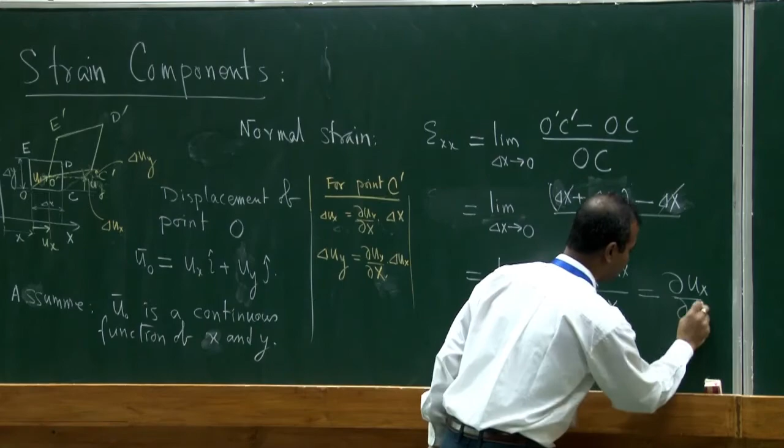CALDAM School on Discrete Mathematics was organized in February. It brought together prominent and leading researchers in discrete mathematics to give lectures on recent developments in the area. This was organized to benefit university teachers, researchers, and doctoral students in the area of discrete mathematics and computer science, by exposing them to recent developments in discrete mathematics, algorithms, combinatorics, and graph theory.

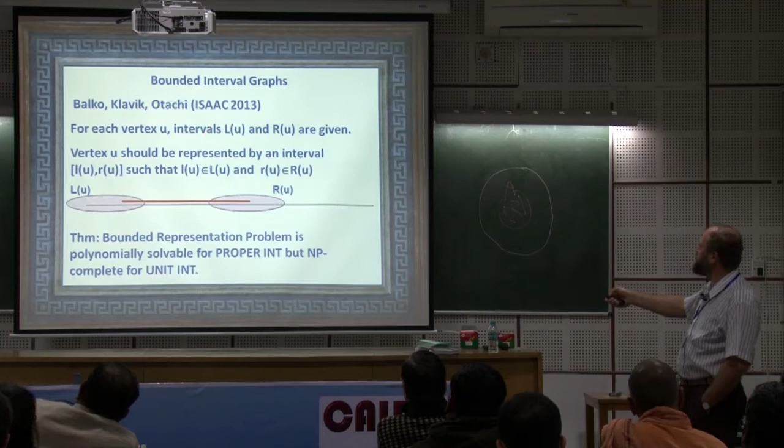Okay, so the bins that were easy before remain easy. These big bins, which simply have huge size, we don't change the weights there. Now we look at the dedicated bins, which are the bins that have a single item. You get an interval where the left point can lie and an interval where the right point can lie. Admissible positions for the left point of the interval IU and for the right point of the interval IU.

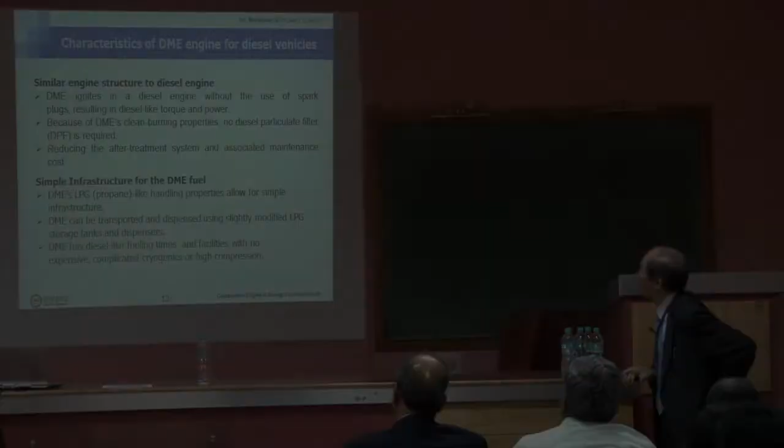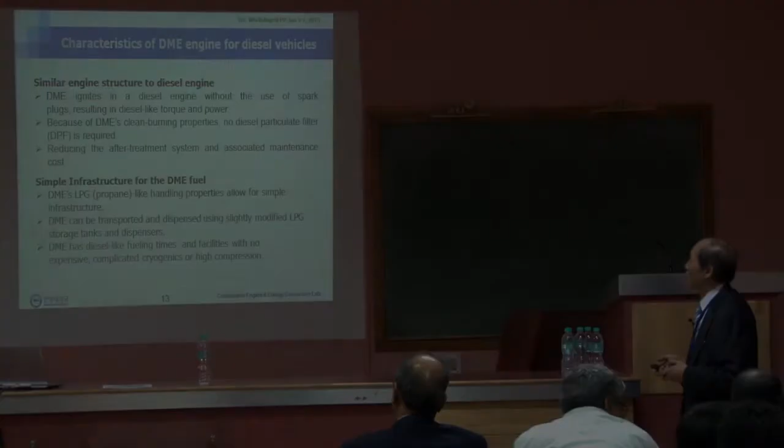In January, the International Workshop on Sustainable Energy, Power and Propulsion was organized. The 3-day workshop was held at Jadavpur University, Kolkata. Several teachers, researchers and engineers from academia, industries and research organizations worldwide attended this event to discuss major technological advances in this field.

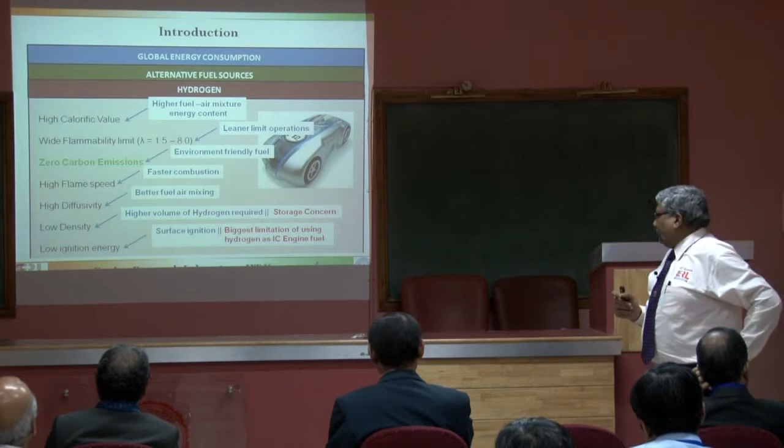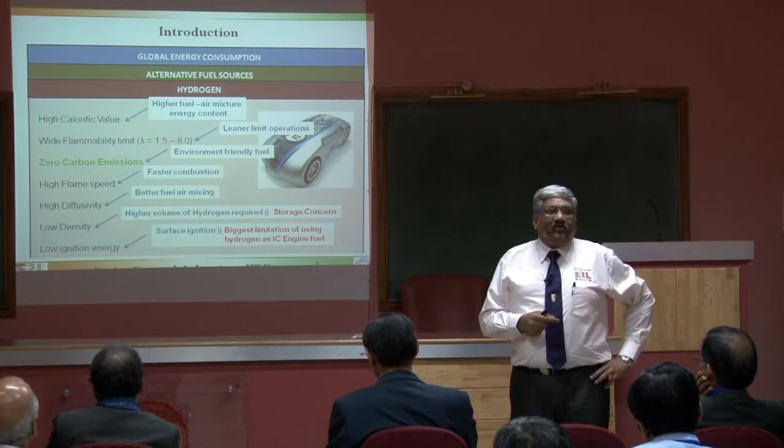An order of magnitude lesser amount of ignition energy is needed to initiate the combustion. So that's very good because we don't have to invest too much energy to start the combustion. But that's very challenging because if there are any carbon deposits inside the combustion chamber, even the hot tip of the electrode spark plug is enough to uncontrollably initiate the combustion.

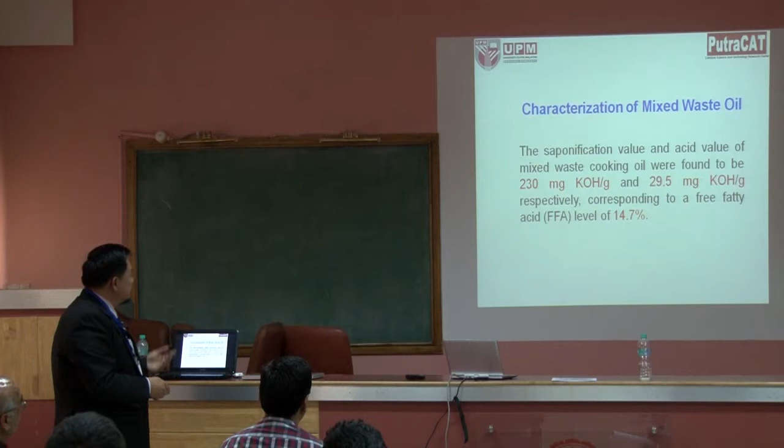And the oil we clean up and we reduce the water content and also some of the food from this oil, and then we run some acid. It consists of 14.7, a bit high level of acid content as well.

Short course on structure and characterization of materials was held in December 2014. It was organized to demonstrate the relevance and importance of key materials characterization methods to teachers and industrial participants, and to familiarize them with technical advances that have taken place over the years.

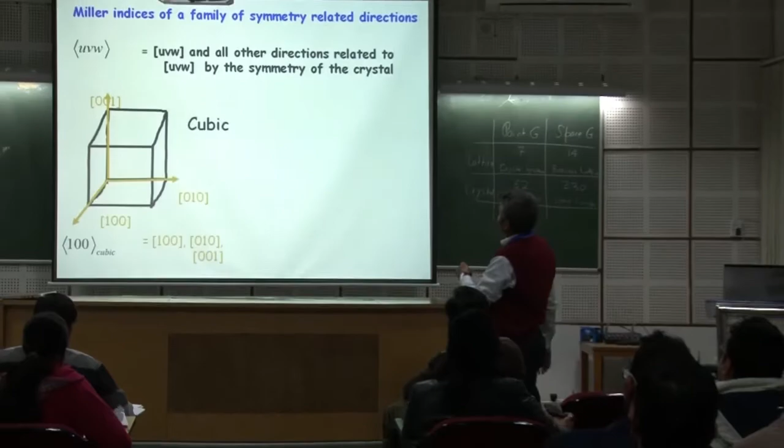Okay, if it is a 2, then it forms a needle. So that information we can immediately judge before seeing the microstructure. That information can be obtained by looking at the n value. So now once we know this, I can get it at a different temperature.

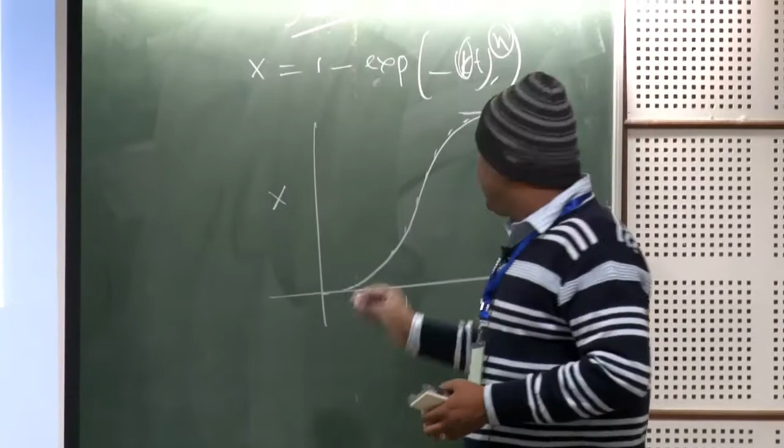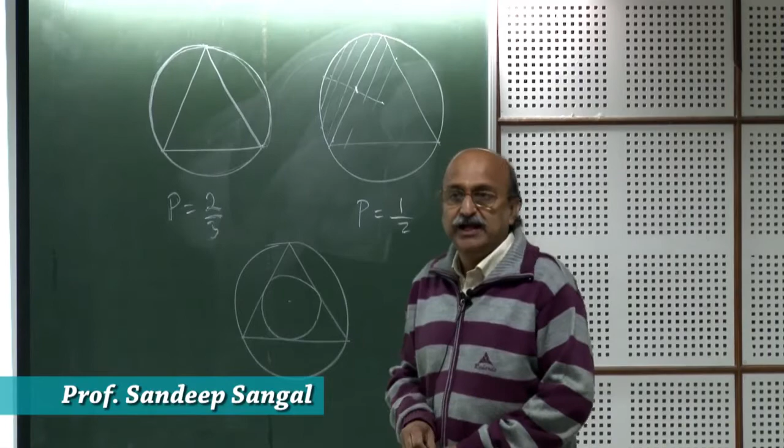So area of this would be 1/4 of the area of the full circle, and if the point has to lie outside, then only the chord length will be less. The probability is 1/4. So, there are at least 50 research publications written on this Bertrand paradox.

TEQIP workshop on digital communication and networks was held in December. It aimed to highlight the most important concepts of digital communication and networks, especially from the perspective of undergraduate teaching. The focus was on basics and ideas that constitute the bedrock of modern communication systems.

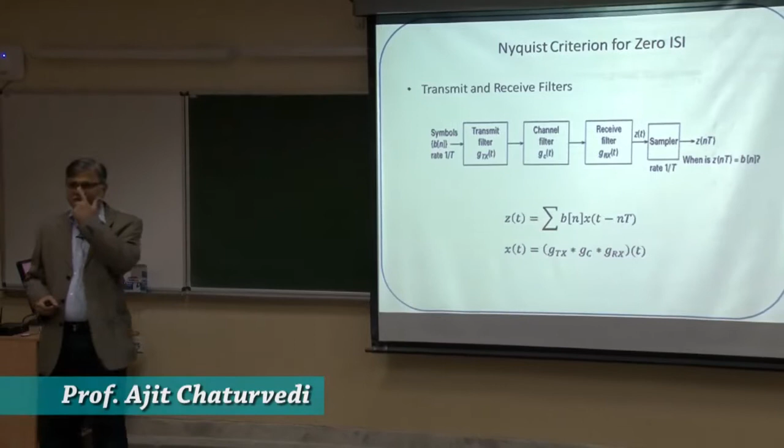So, the next obvious point to be discussed is the pulse shaping or the Nyquist criterion for zero intersymbol interference. In all digital communication systems, it shows up because it is not present in analog communication systems, because analog communication systems do not have any symbol representation.

In December, a winter internship and visiting researcher program was organized. This was a 3-week program in which selected students and teachers worked under the guidance of IIT Kanpur faculty members.

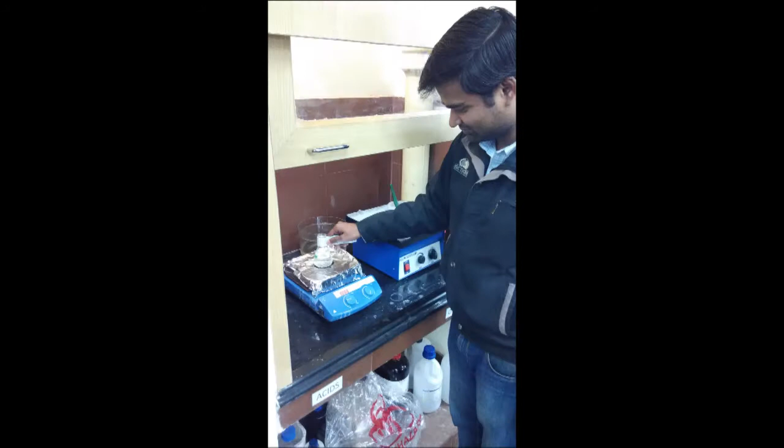Bhupesh Dutt Sharma. I am coming from Motilal Nehru National Institute of Technology, Allahabad, and I am a research scholar in the Department of Mathematics, and I am here to attend the winter internship program, which is an initiative of TEQIP and IIT Kanpur, a very good initiative taken by these two institutions.

Hello, I am Neha Gupta and I am here for the TEQIP IIT winter internship, and it is very nice to be here. I am searching for so many papers, and we are visiting the library also to see thesis of students so that we can get some guidance for our future work.

Myself Praveen Kumar Sahu. I am a research scholar in the Department of Mathematics, MNNIT Allahabad. Here I am working under the supervision of Professor Ratish sir in the field of computational fluid dynamics. We are working on computational fluid dynamics methods for the problem of shock waves in astrophysics.

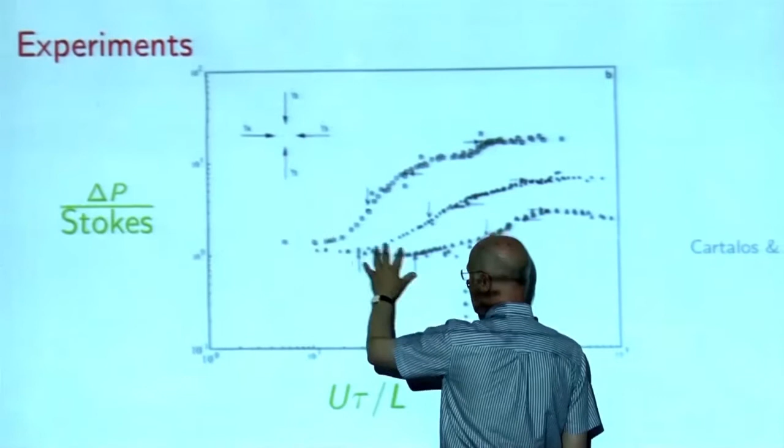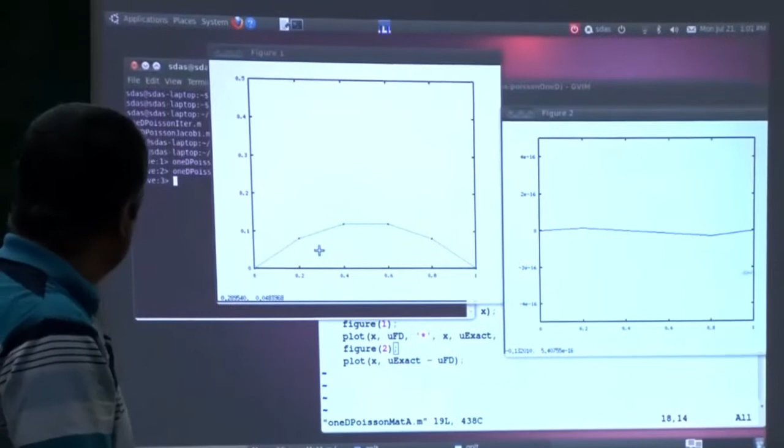Or more complicated models, they all have roughly the same slightly non-linear effect. Well, I showed you this before. If you look very carefully, you can see the pressure drop does decrease, as in the computing. So in that model liquid, we get this bit right. We of course fail to get that bit right. So this is a 50% success rate, fairly close to 0. So this is not the problem that we should be looking at.

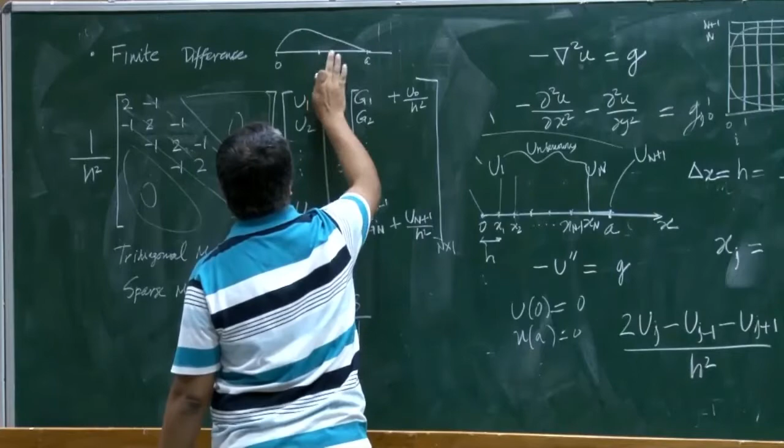So then I take another problem in which what I do is take the 1D case, but the distributed force is non-zero. So this is 0, this is A, and this is the entire string. It is non-zero only over the first half of the interval, then subsequently there is really no distributed force, so that part of the string should be a straight line.

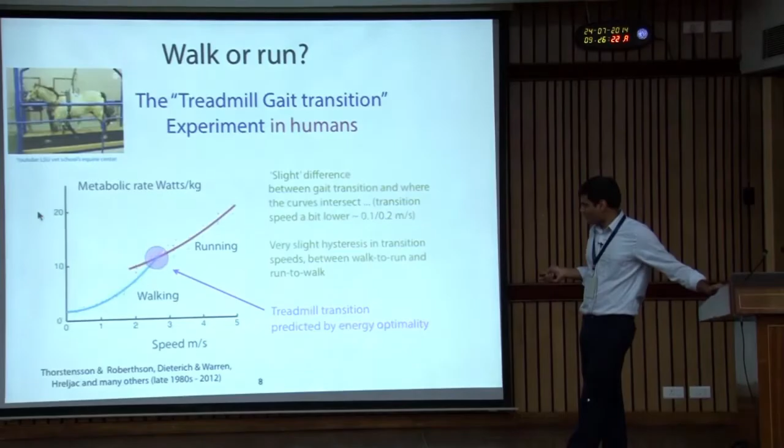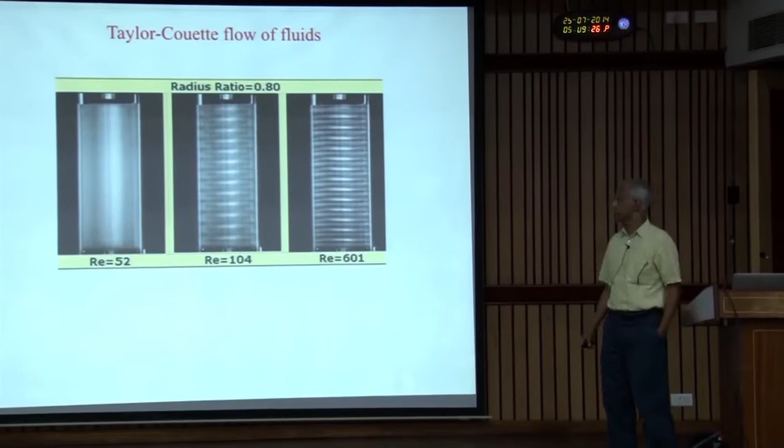The particular problem that I am interested in, that is widely used in the domain of fluid mechanics, is Taylor-Couette flow. That is, you have two concentric cylinders.

You have an inner cylinder, which you can't see, and then an outer transparent cylinder. There is a fluid in between, and when you rotate the inner cylinder, you can measure the viscosity from the torque. That is why this is very frequently used—in fact, it is the most commonly used viscometric device to measure the viscosity of fluids. But the interesting thing it does is, and this is an old problem,

as you increase the rotation rate of the inner cylinder, there is a spontaneous instability, and you start seeing bands of this kind.

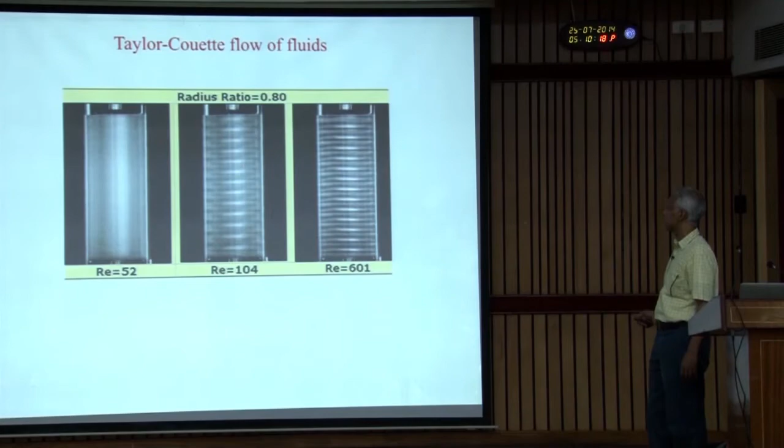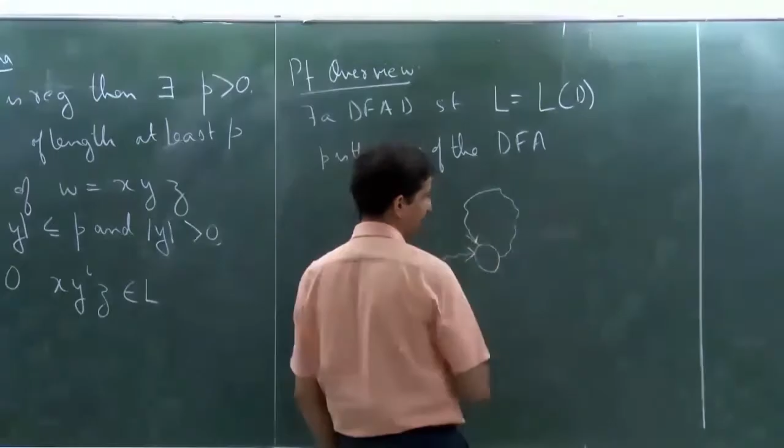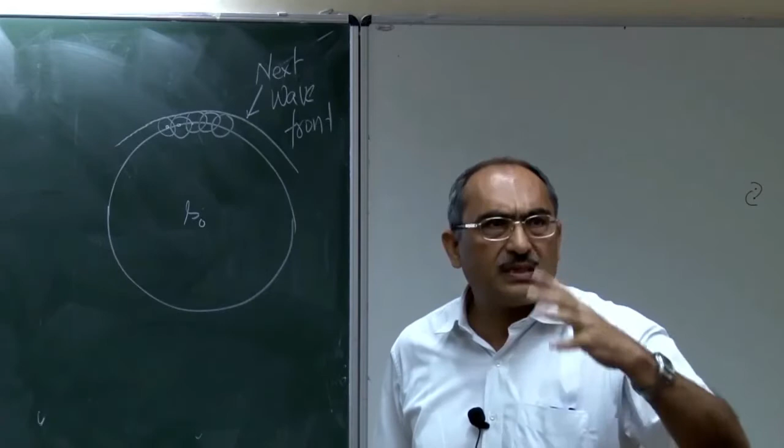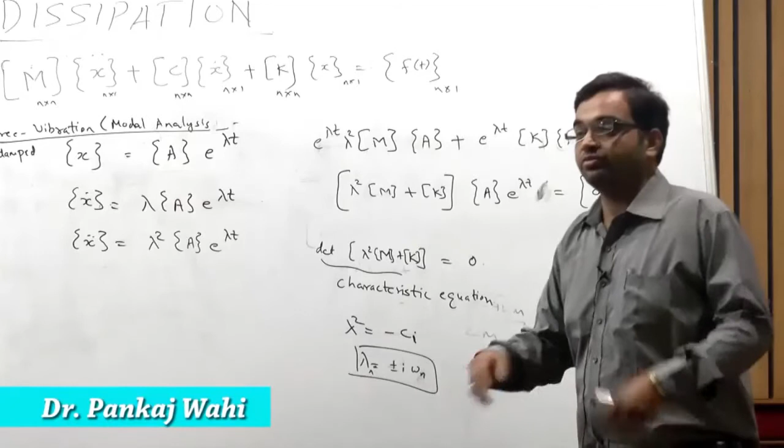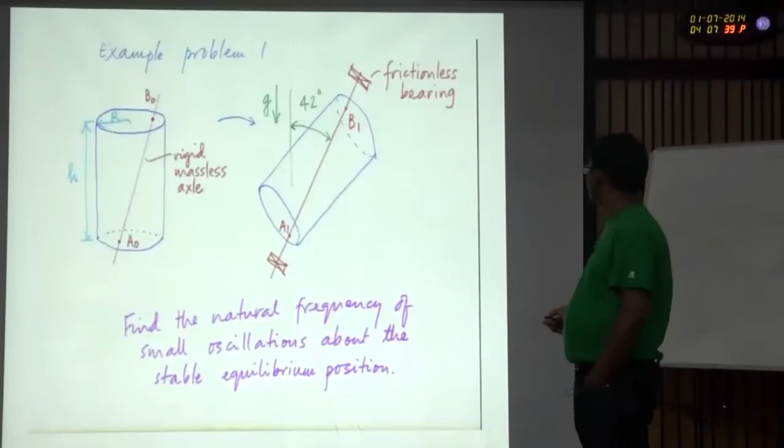So here is a problem. There is a uniform rigid cylinder. I choose an arbitrary point A0 on the bottom face, another point B0 on the top face, and put a rigid massless axle passing through these two points. Then I take this axis A0, B0 and orient it so that it is 42 degrees or some such from the direction of gravity, so that this becomes some points A1 and B1, and I put it on rigid frictionless bearings, and then I release it—it finds an equilibrium position.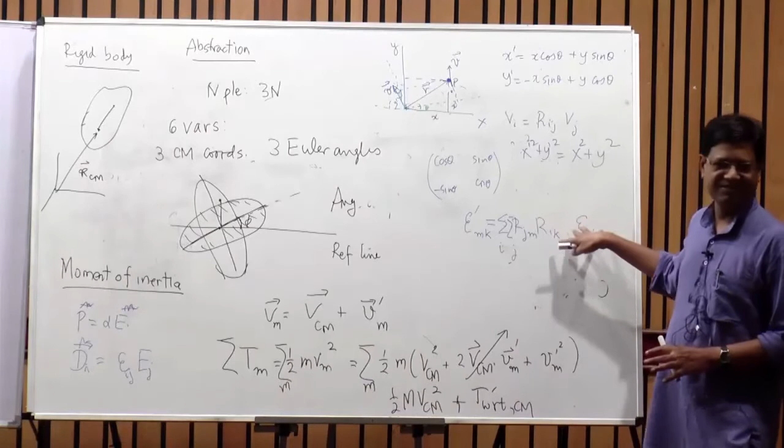In June, TEQIP workshop on mechanics and physics was organized. The 4-day workshop had rigorous sessions on various aspects of mechanics and had a detailed discussion on what should be taught as part of physics in the undergraduate curriculum of all engineering institutions.

Product of these three matrices, it is in this form. I need to just look at it more carefully, and it can be done.

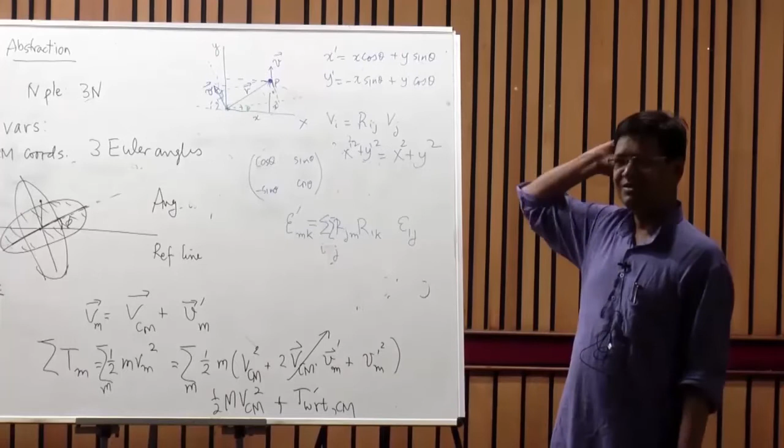So this is how we get this 9 component object transform from blue frame to green frame.

In terms of position and momentum, I can write them as two first order equations, and 2 first order equations would still require 2 initial conditions. That can't change. But now what I'll do is simply tell you what is x at t equal to 0 and what is p at t equal to 0. I give you an initial condition just of the variables concerned.

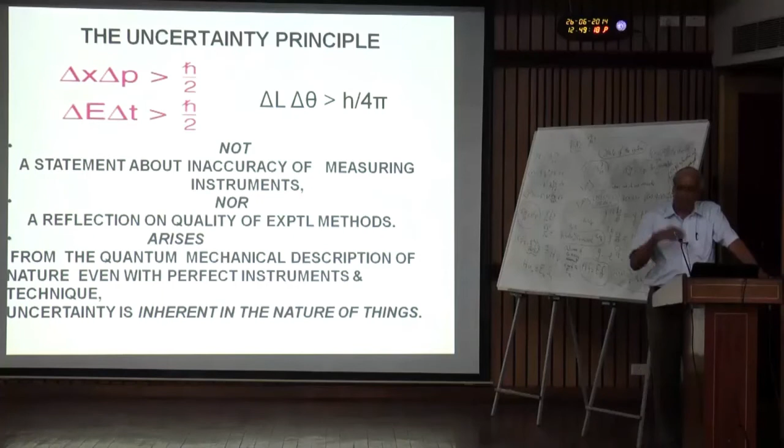The trio of this: delta x, delta p, delta e, delta t, delta l, delta theta. Delta e, delta t is a little different because they are not simultaneously measurable quantities.

Psi is to be known. If psi is known, everything about the system is known. What is everything about the system? What is it that you want? First thing is energy. When energy is known, along with that, its tail comes. What is that? Eigenfunction. Like that. So find all the information, put them together. Psi is the grand fellow. But these fellows are energy eigenfunction, momentum eigenfunction.

After this, the TEQIP workshop on teaching methodologies in chemical and material sciences was held in February 2014. The workshop tried to evolve a comprehensive mandatory curriculum in material science for all engineering students.

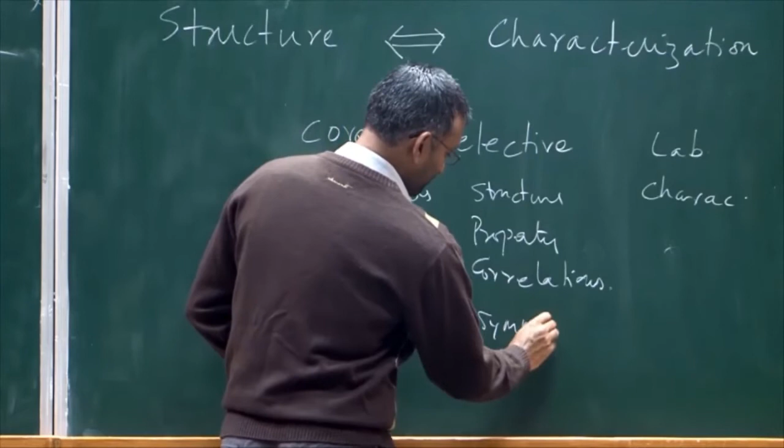Somebody was talking about the mechanical behavior. How does that behavior come from the? I think things like symmetry and space can go there. Advanced crystallography. No, as elective. Yeah, those are elective.

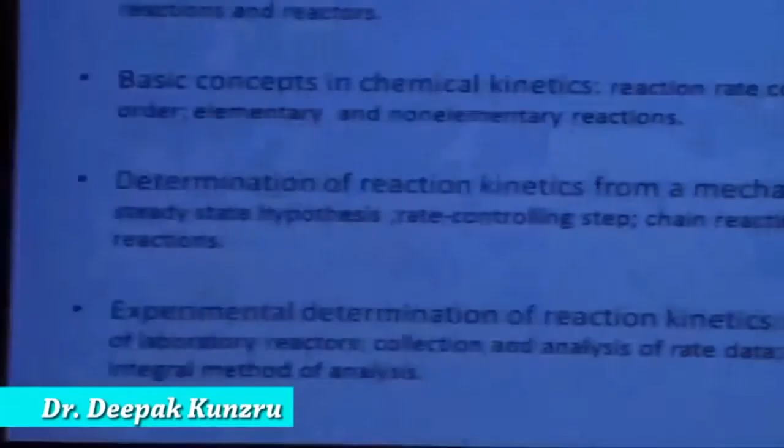So some of the suggested topics which are listed here, we can have a discussion on that.

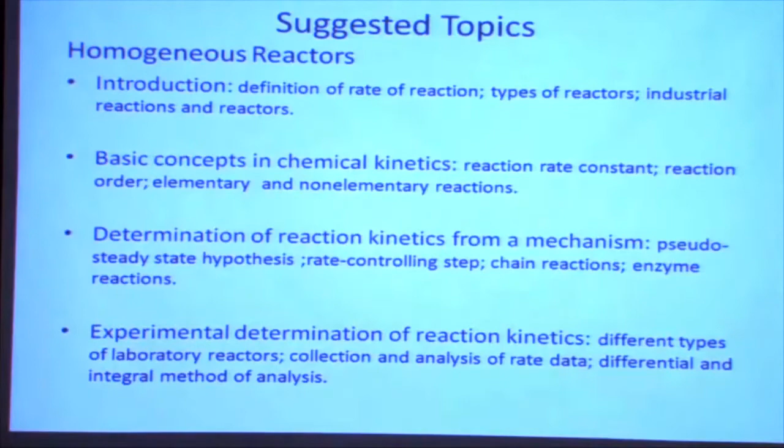Basically, you can divide it into two groups: homogeneous reactors and heterogeneous reactors. Now, as Professor Goutam Deo gave a sort of summary yesterday, some IITs have two courses in chemical reactor engineering, some have one. I don't know about the other colleges, but at least at IIT Kanpur we have one compulsory course and one they can take as an elective.

Does it tell you bonding or valence or something else? One can make a table of one page for every technique, that tells you the applicability of the technique. What kind of problem do you use this technique for?

Workshop on system engineering was held in December 2013. This was conducted based on popular demand from the faculty and students of the institutions under QIP IIT Kanpur.

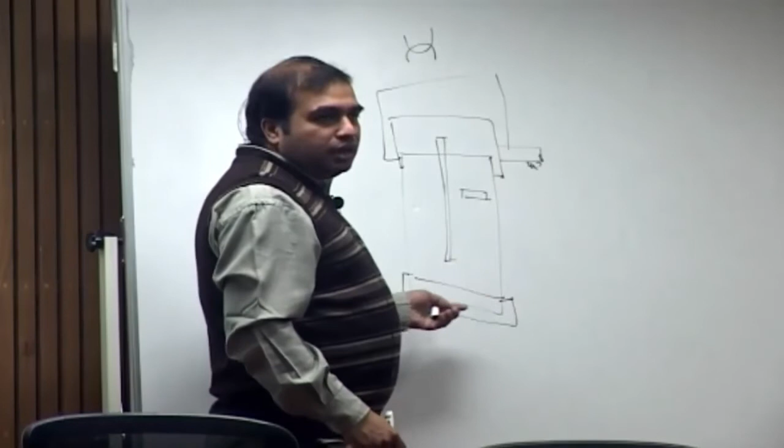Carrying mechanism for you to carry, and this can be folded in, and they will give you two bases, one for your home, one for your office. The formability is very, very important. How can you change the shape so easily and get what you want? That's very, very important, okay.

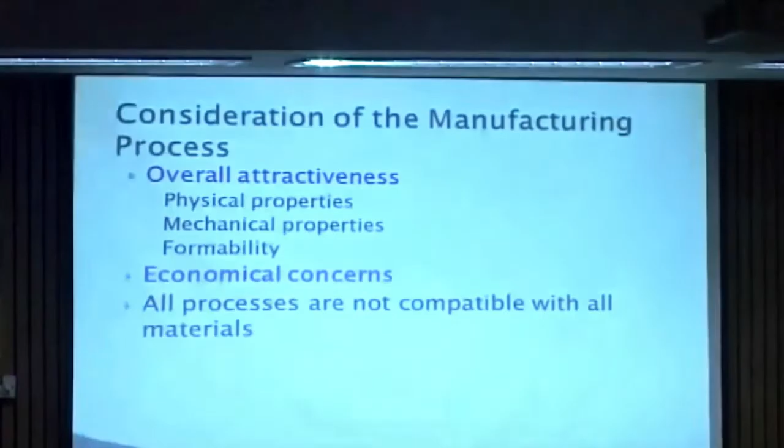In October 2013, Pravartana, a workshop on applied mechanics, was held. The workshop featured detailed research-oriented talks by experts from a wide spectrum of topics in mechanics. So not clearly defined.

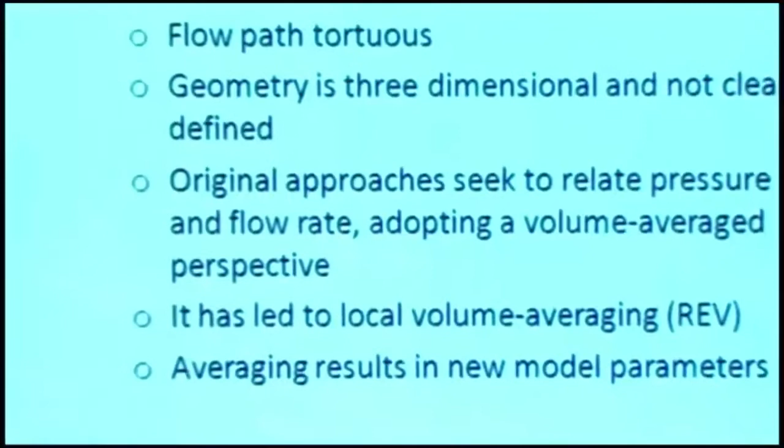The traditional approach is to go around this difficulty by using averaging. The moment you average, it leads to new model parameters.

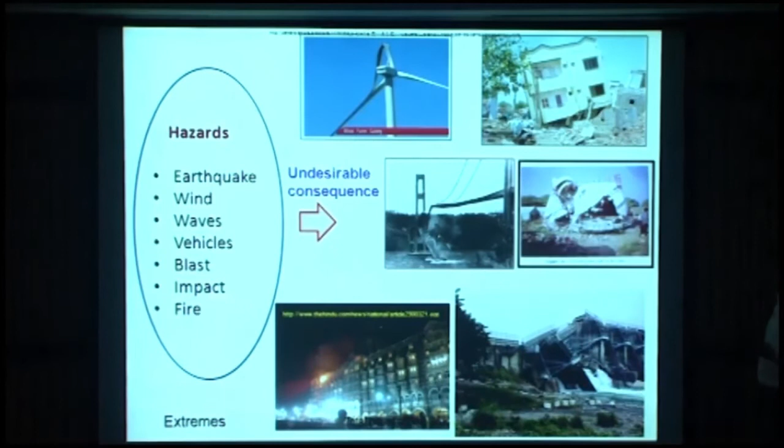For example, earthquake can be viewed as extremes of geophysical process like tectonic process, wind is geodynamical processes, and so on and so forth. Now, they are all ridden with uncertainties and we need to model them. So we classify uncertainties as being aleatoric, epistemic, and our friend already used this word, unknown unknowns, and there are human errors which could be bona fide or mala fide.

In universities, at least in chemical engineering and mechanical engineering departments, transport phenomena is sort of a mandatory course in the curriculum. So in this talk, I'm going to go through a classroom type lecture on Reynolds transport theorem, which some of us know is an important theorem to arrive at the conservation equations in the appropriate form.

So the Reynolds transport theorem comes under the realm of kinematics. So I thought to show one slide on the basic definition and what we mean by kinematics. It is nothing but just the study of the motion of the object without concerning the forces that are causing that motion.

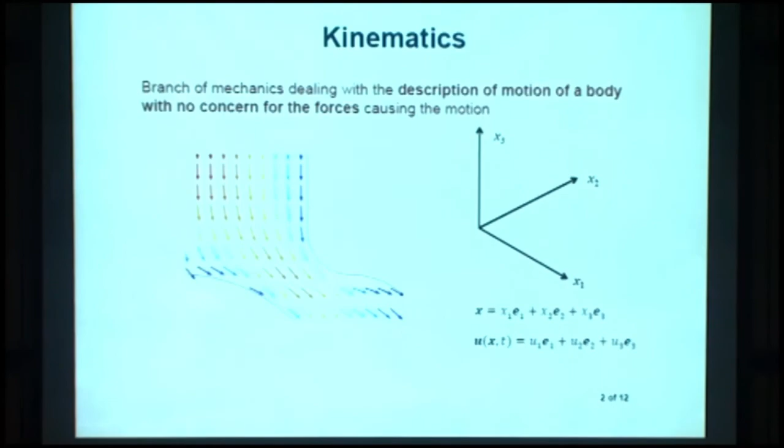In May 2014, QIP IIT Kanpur offered a summer internship and visiting researcher program. This was the first exercise of its kind in the country. Through all these initiatives, QIP IIT Kanpur has successfully established strong links with its quality circle institutions. Inputs from faculty and students on various models of interactions has helped us in organizing these events in a more effective manner and plan for future events in a way to help them with pedagogy, research, and overall development.